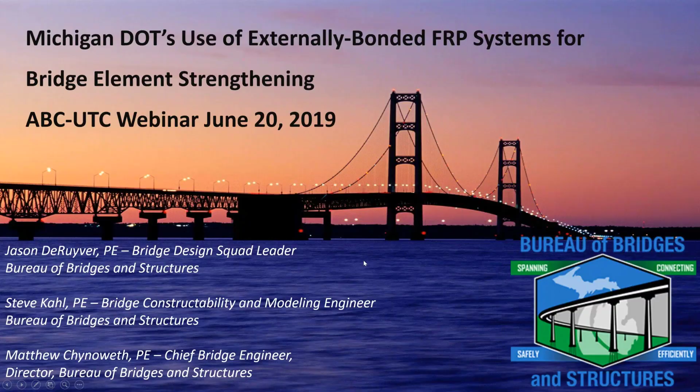What we're going to talk about today is two projects, two case studies where we have used bonded FRP systems for column confinement and passive reinforcement. We're going to talk about I-75 over the Rouge River, which is the biggest bridge in the state of Michigan, and a very complex ramp within our I-75 M8 interchange. Both of these are in the city of Detroit, and I'll show those on a map in a minute.

We are going to talk about the guide specification for bonded FRP repair update, the AASHTO guide specification. There are currently some limitations to that, which we'll get into in a bit, and that is actually very quickly going to be under contract to be updated. Then we just want to touch briefly on the future of FRP and infrastructure as it relates to inspection of FRP elements, load rating, damage, and all of that — just a brief hint as to what we need to work on as an industry with FRP systems.

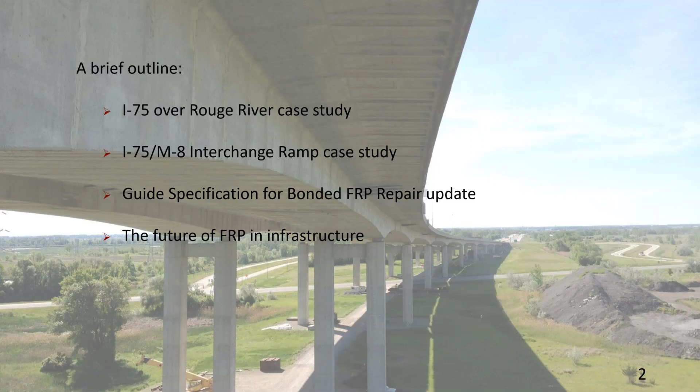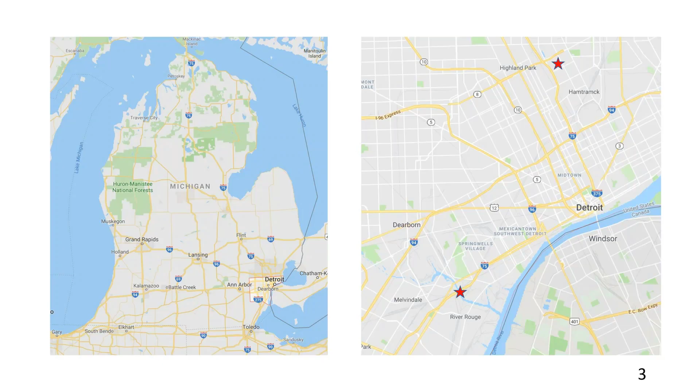So how are these FRP bonded systems relevant to ABC? How is it relevant to our movement towards accelerated construction and less user delay? Well, the use of the bonded FRP systems on these two projects resulted in no impacts to freeway traffic above and very little impact to local traffic below, just in terms of staging and equipment access. So you're driving over the freeway, you would never know that we were working on these bridges.

The systems can be installed fairly quickly, either via pre-qualified contract or contractor, as the first one will show, or using direct force maintenance staff, which is how we did the second project that we're going to show today. So the strengthening or confining of these elements is a viable option for asset management, long-term asset management, which can delay replacement — and replacement of these elements is obviously a huge impact to mobility and traffic. That's how these systems can be relevant to an ABC type of application.

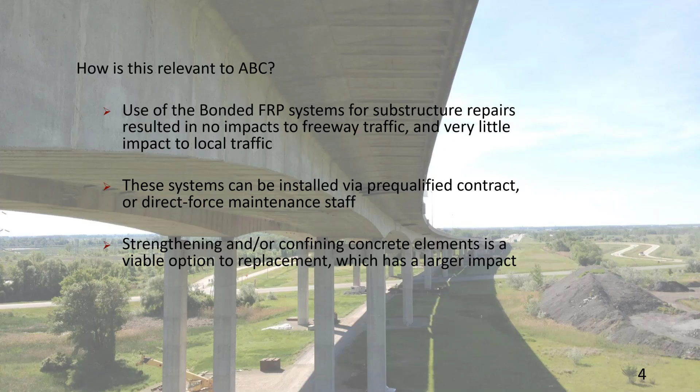So the first project we want to talk about is our I-75 bridge over the Rouge River. This is a 109-span composite steel structure consisting of many cantilever and continuous spans, with a main 3-span continuous unit over the Rouge River.

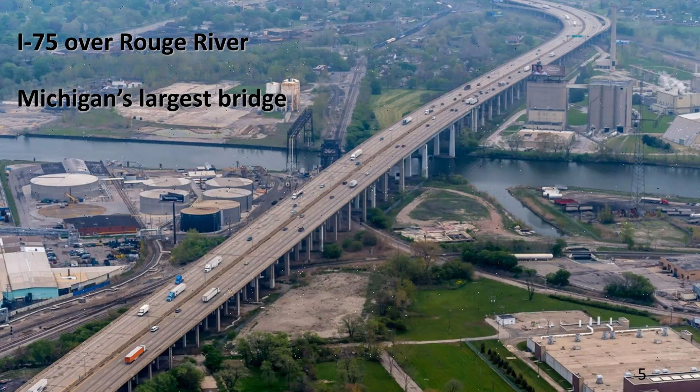As you can see, this chart shows the largest bridges that we have in the state relative to deck area. I think a lot of folks associate the Mackinac Bridge, which is the second one there, as the largest bridge in the state. It is in fact the longest, but when you consider the length and width, the total deck area, our Rouge Bridge has 1.1 million square feet of deck area, thus making it the largest in the state. And this is just a cool photo of the bridge in action.

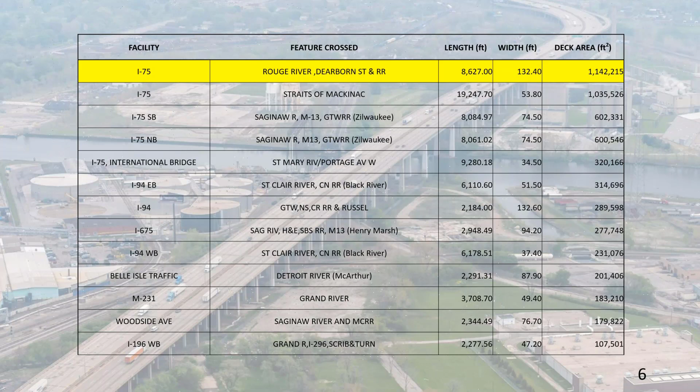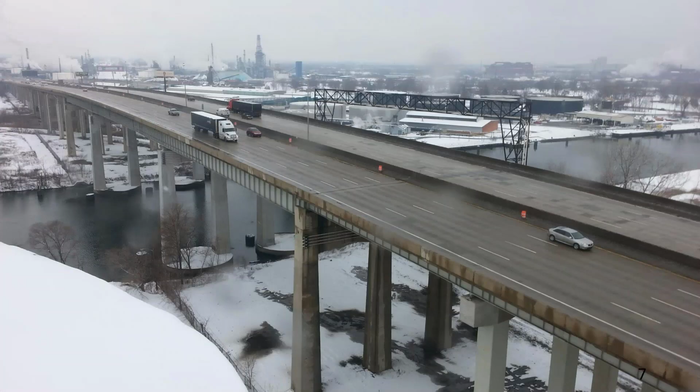So some facts about the bridge: prior to 2018, the bridge was considered to be in overall poor condition. We had a deck NBI rating of 4. However, the steel girder superstructure and the piers were maintaining good to fair condition.

Knowing that we were going to have to do something with the bridge deck, we set out on a pretty comprehensive asset management plan and looked at all options for rehabilitation. We looked at a deck replacement option, a bridge replacement option, different types of bridges that could cross this, and post-tension segmental. Ultimately what we decided was, due to the fact that this particular bridge represents the lowest point in the Rouge River corridor...

This river has a lot of maritime traffic serving the Ford Rouge facility, and at 110 feet over the channel, this is the lowest crossing of the entire Rouge River basin, so we knew we would have to raise the bridge. There are interchanges on either side of the bridge, at each touchdown point of the bridge. All of that led to cost estimates in the $400 to $500 million range to replace the bridge.

But since the steel girder superstructure is in fairly good condition and the piers can be maintained in good condition through various asset management applications, we ultimately decided to replace the bridge deck instead. That was about a $100 million project, and I just want to show some cool pictures of what that looked like.

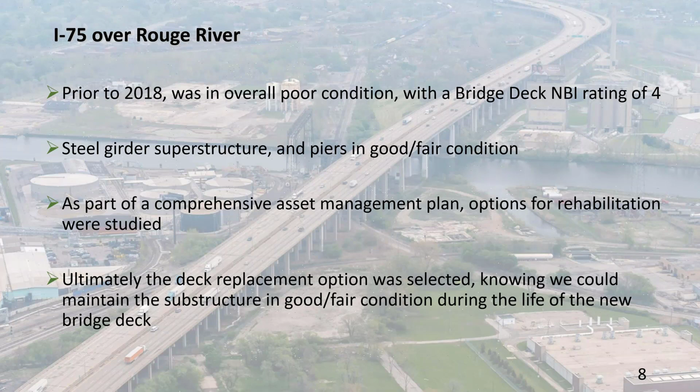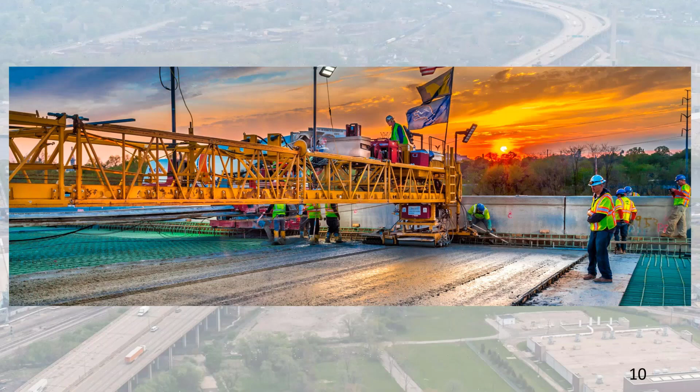So what we decided to do with the many, the forest of columns and piers that we have out there supporting the superstructure, we've had issues. These particular concrete elements contain slag aggregate, which Steve is going to talk about in a minute here, regarding why that's an issue.

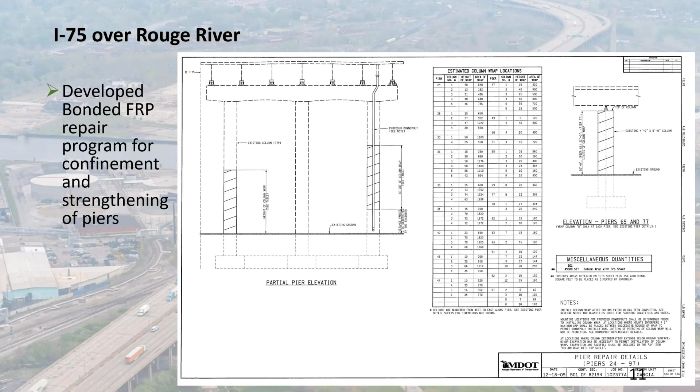We developed a specification for column wrapping. We worked closely with Jim Gutierrez from Caltrans, who's very knowledgeable in FRP systems requirements, and our specification actually addresses the seismic requirements. Even though Michigan is a low seismicity state, we wanted to make sure we were following the best specifications out there, and we worked with Jim on those.

As you can see, this specification just sets up the minimum properties - it's a generic specification. This specification, along with some of the example calculations we're going to show, we're going to make available with this presentation so everybody can have access to this.

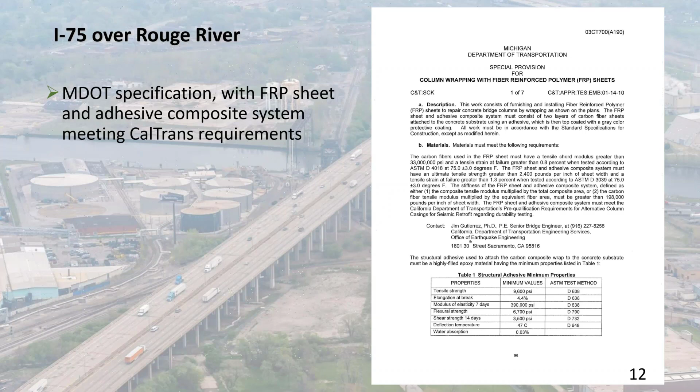We put together this MathCAD sheet, and ultimately decided - there are two main specifications we could have used here: the AASHTO guide specification, or ACI 440.2R-08. Ultimately, we decided to use ACI.

Part of the reason is that AASHTO currently has a fixed FRP strain limit at the concrete FRP interface of 0.005 microstrain, so you really don't get to mobilize more of what strain the materials are capable of. ACI allows FRP strains up to 0.009 microstrain, depending on the concrete compressive strength, and it maxes out at an allowable concrete compressive strength of 8 KSI.

The other big difference is that AASHTO specifies a fixed strength reduction factor of 0.85, which is quite restrictive, considering that the entire guide specification really limits the use of these on flexural members, which have relatively ductile types of failures. Whereas ACI 440 follows the general provisions of ACI 318, which allows different strength reduction factors - for a tension-controlled failure, a 0.9 strength reduction factor, and for a compression-controlled failure, 0.65. Overall, we thought the ACI specification offered much more flexibility for us.

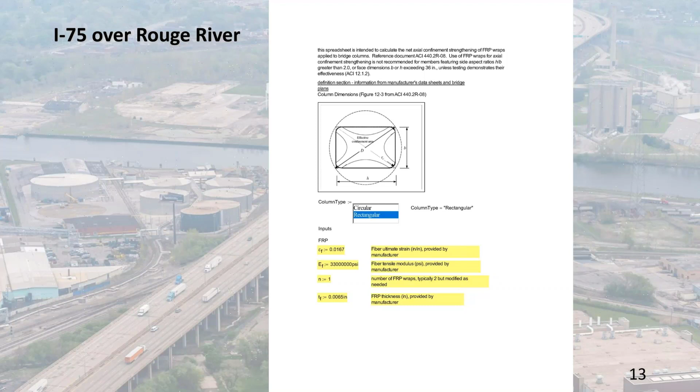As you can see from the sheet here, we do have rectangular columns, so we selected those appropriately and started entering in strain values and the tensile modulus. We go through the inputs for the concrete and the strains in the concrete, and calculate the equivalent circular cross-sectional area for the column.

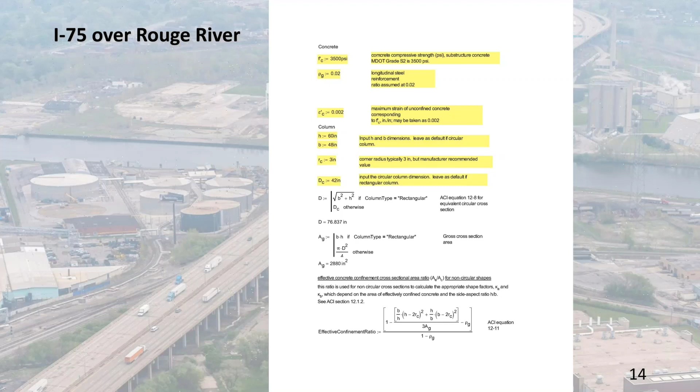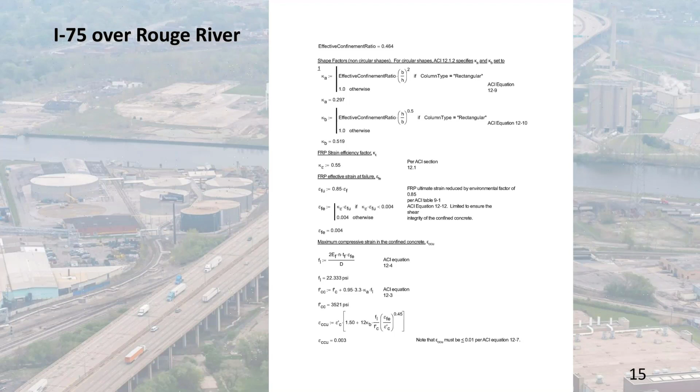We calculate the effective confinement ratio per ACI. We go through all of the applicable shape factors, the FRP strain efficiency factors, the strain at failure, and then we can calculate the maximum compressive strain in the confined concrete. From there, we get the actual additional capacity provided by the FRP system to the benefit of the column.

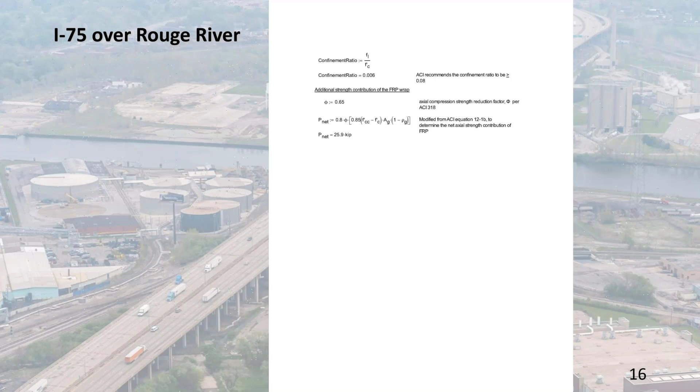So what I'm going to do is turn it over to Steve, who's going to walk through the particulars of why slag aggregate is an issue for us, and then we will go through some of the construction of the project.

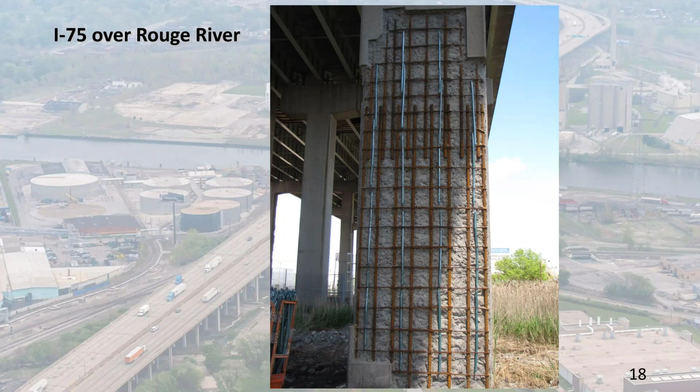After the crack formation, if you do any patch repairs with slag aggregate, you want to carefully make sure you define your removal areas, because if you take a hammer and chip away, you won't be stopping. So you have to carefully lay out the repair area and stay within its confines. You're also going to need a way to maintain or hold that patch in place throughout the life of the structure.

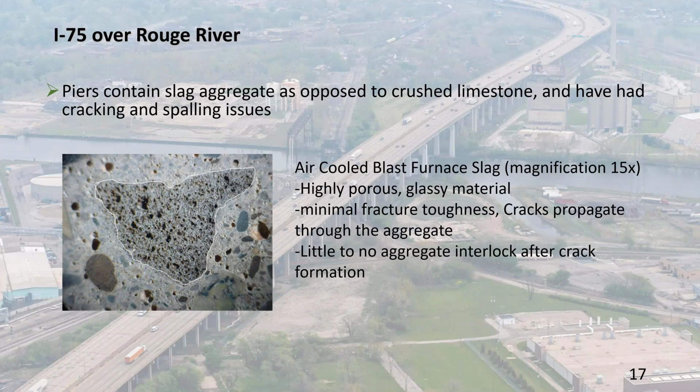So the first step in applying this FRP reinforcement was to remove the unsound concrete from the pier columns and expose the steel for a better bond and performance. In addition to the FRP, we wanted to ensure longevity by placing sacrificial anodes to protect the steel from the ring anode corrosion effect, which combats the issue when you place new concrete next to old. You form an electropotential that accelerates corrosion in the old concrete, so to mitigate that, we threw in the sacrificial anodes.

So you remove the old unsound concrete, and then you begin to prepare the column for the FRP wrap. Are we on to the next stage?

Okay, excellent. First off, of course, you apply the patch material and let it cure. You want to make sure the edges on square columns are rounded to reduce the stress on the FRP, and typically that's a 1-inch radius. Certain manufacturers may specify a preferred radius, some may be smaller or larger depending on the system, but they're roughly around the 1-inch ballpark.

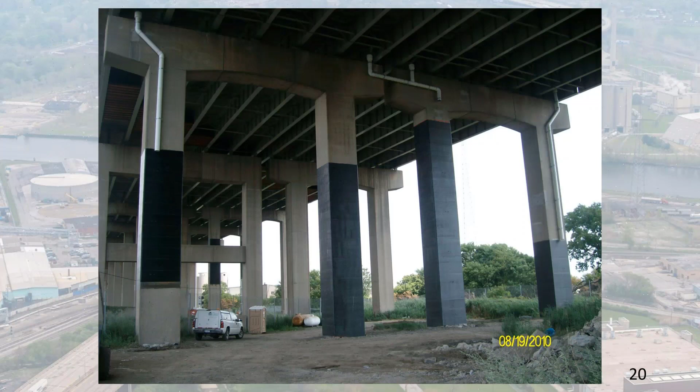So you patch the material, prepare the surface, and apply the primer, and then you're ready to actually apply the wrap. The subcontractor for this particular project was experienced in FRP work, and the spec required that the contractor choose a specialist that was experienced and also have that representative on site for troubleshooting and guidance.

The FRP subcontractor, since they were experienced, was able to use a particular device to ensure that the carbon fibers were fully saturated with the epoxy bonding material. They used an impregnating device that, similar to the old laundry squeegee rollers, passes the fibers through a saturated roller system that makes sure the individual fibers are coated with the epoxy. Then they carefully place the wraps around the columns and roll them into place to get rid of air bubbles.

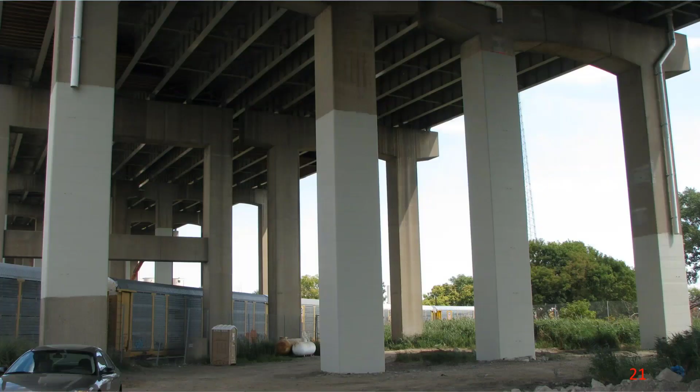After the FRP is installed, typically you put another layer of epoxy on top of the FRP to further coat and make sure the fibers are coated and bonded with the epoxy system. Then after curing takes place, you top coat it for environmental protection and UV protection, although the epoxy itself also has chemicals to resist UV degradation.

The top coat is generally gray concrete color, and depending on the particular manufacturer, they'll have specific requirements. They'll have either their own brand, or a list of compatible products you can use for top coat, for both aesthetics and environmental protection.

As a summary of the project, it was fairly large, but compared to replacement, not really. This project was about $6.5 million for everything, including 23 rehabilitated pier bents, or a total of 71 columns. Quite a bit of patching concrete was used, almost 500 cubic yards, and 49,000 square feet of FRP reinforcement was applied. This was all done in one construction season.

Since we were below traffic, we didn't have to worry about traffic shifts or any other restrictions in regards to that. The contractor was originally Posen Construction, now called Z Contractors, and the specialist was called Structural Group. They did quite well.

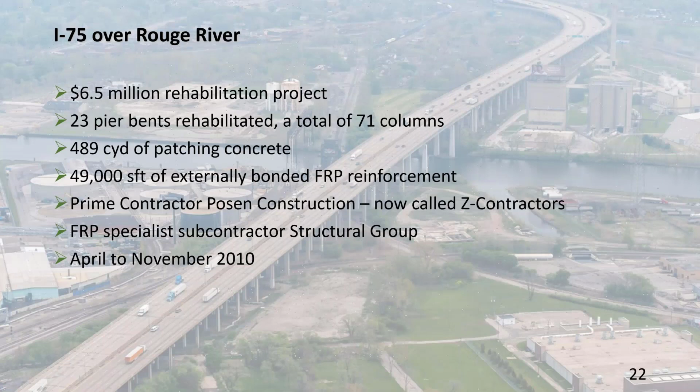Okay, so that represented an example of a project that MDOT did. We designed in-house and let as a capital project. I'd like to show a different example now. This is a project where we worked with a local university to develop a repair scheme, and then our region bridge support folks and direct force maintenance folks did the repairs.

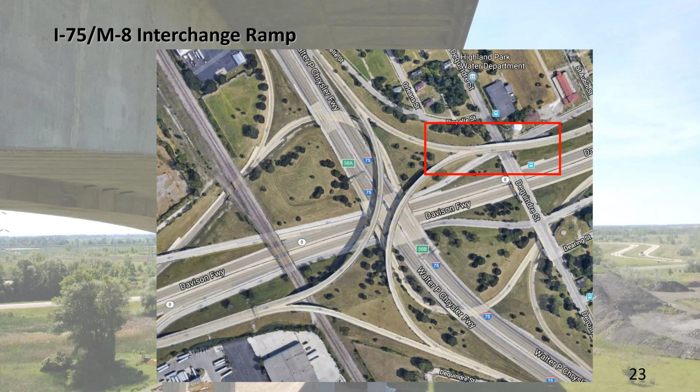And so this is in a very busy interchange on Detroit's north side. The previous project was on Detroit's south side. So this is our I-75 M8 interchange. This is a full freeway-to-freeway interchange with a lot of complex movements. And what we have on this ramp here is, this is a ramp that takes you from one of the service drives to northbound or southbound I-75.

And it's got a very unique configuration. You can see from the geometry there with the service drive coming underneath, we don't have a cap and column type of a situation. We have a single column with a very massive knuckle bearing and then intermediate bent. And this is a fixed bent, so it's allowing for rotation but no translation whatsoever.

It's on a curve, 950 foot. And non-uniform span length, so we don't have balanced span conditions either side. We have an 86-foot span on one side and a 137.5-foot span on the other. And so all of these conditions and this structural configuration led to some forces on this column that caused cracking and spalling. Just some details here - this was built in 1967, by the way.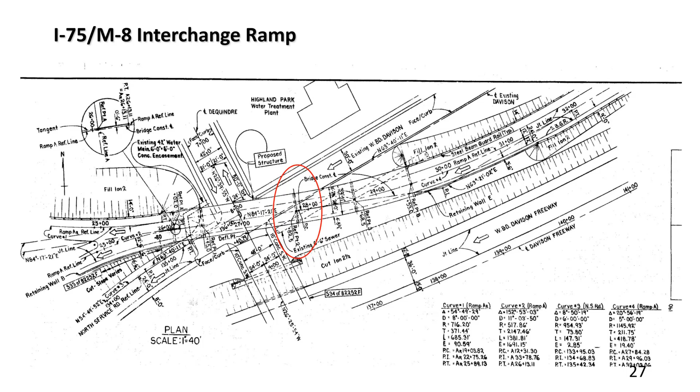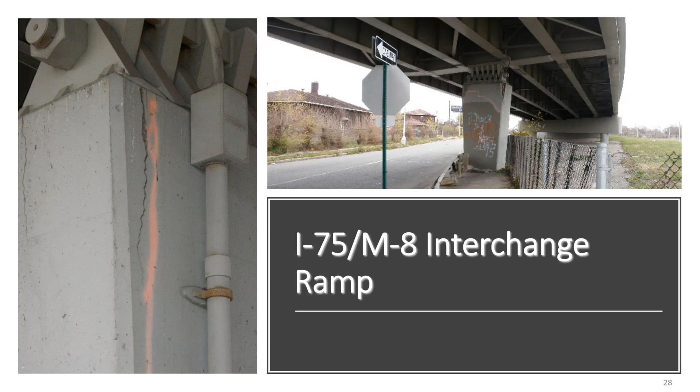Thanks, Matt. As you can see here, the forces Matt was describing caused several cracks and spalls near the top of the column. We just have a few slides here showing different views of those cracks and spalls. It's basically on all four sides of the column near the top.

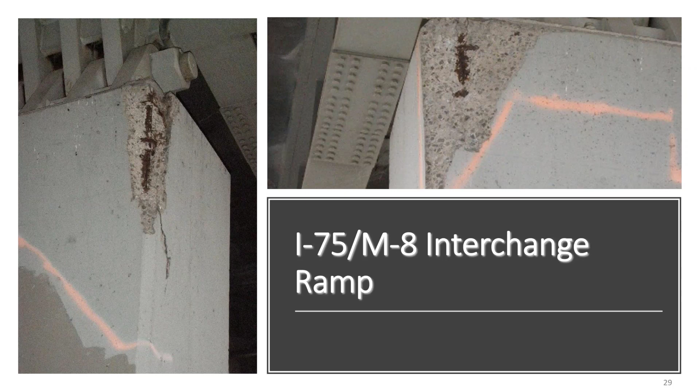All right, in order to do the design, we reached out to one of our universities. In August of 2013, we reached out to Lawrence Technological University, as an expert in carbon fiber design. And he analyzed the bridge and all the loads, and he came up with the actual design for us and sent us over this MathCAD sheet.

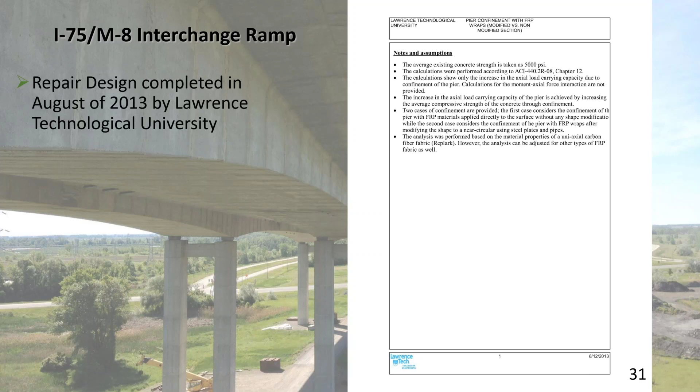Let's see about that. Yeah, as you can see here, we're going to go through this. We will make this MathCAD available on the FIU website here, but this just goes through all of the traditional calculations, the material properties calculations. We went through an analysis of the load carrying capacity of the pier on its own, so unstrengthened and strengthened.

We go through, again, this uses just like we did before, this uses the ACI methodology. So we're calculating the strains based on ACI, checking the confinement, calculating our moduli, and then going through and actually calculating what percentage of additional axial capacity this passive system will provide for us.

And from all this, we calculated the confinement was okay. It kept strains within the allowable. And again, this is a passive system. This is not an active system. And so the total contribution with the new system, we increased the capacity by 42%.

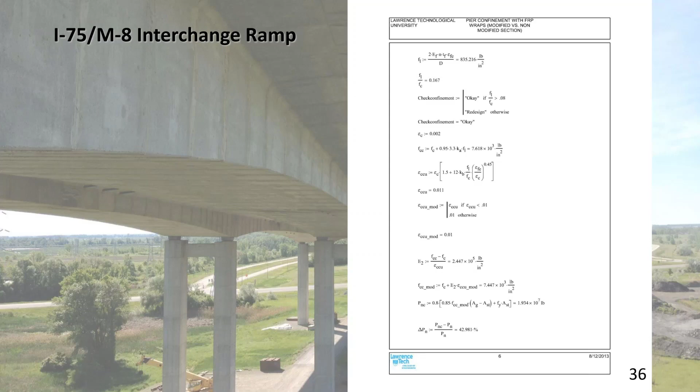And Jason's going to talk through the actual repair of the column. All right, so before we could install the FRP, a few steps had to happen first. We had to close that local road service drive underneath the bridge in order to install all of the temporary supports that we need to install to unload the column. And then we had to patch the concrete.

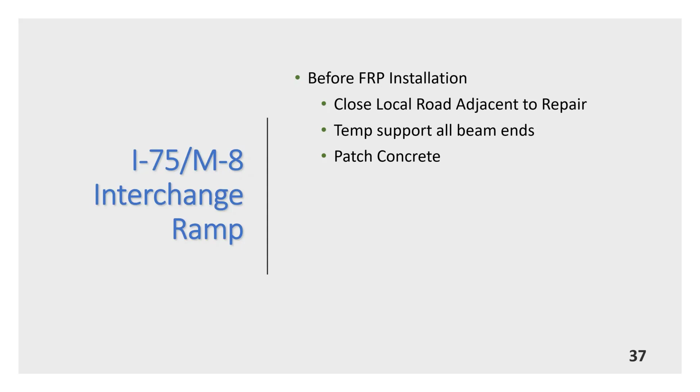Hit the fast forward button here. You can see that the concrete is patched. What I'd like you to notice is that the edges of the concrete patches are pretty rough and irregular, and also that we didn't use any special patching concrete. We just used the standard 4,500 PSI mix that MDOT specs out.

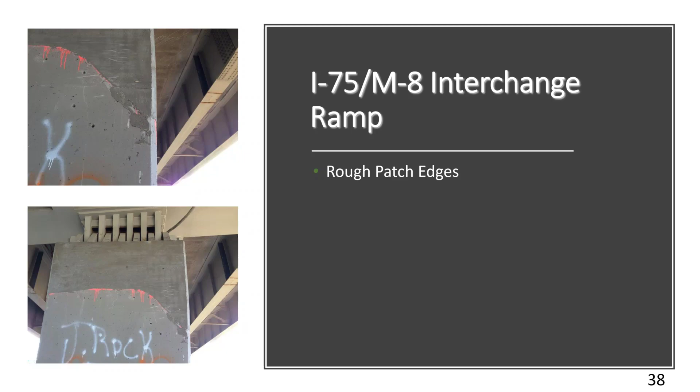Here we are preparing the column surface with a grinding wheel. After we ground all the edges of the patches and all the surface irregularities, we then needed to go in and grind the corners. The fabric we were using required only a 3/4 inch minimum radius.

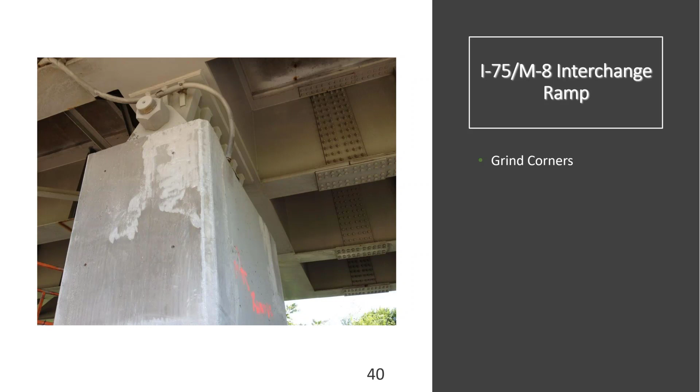In order to finish the concrete surface preparation, the surface needs to first be sandblasted to a minimum ICRI surface profile of CSP3. Basically, that is just removing all dust, dirt, and bond-inhibiting compounds such as oils.

The CSP3 shot blast also opens up the pores of the concrete to allow the epoxy to soak into the surface better, but we don't want to be more aggressive than that with our surface preparation, because then we start introducing more surface irregularities.

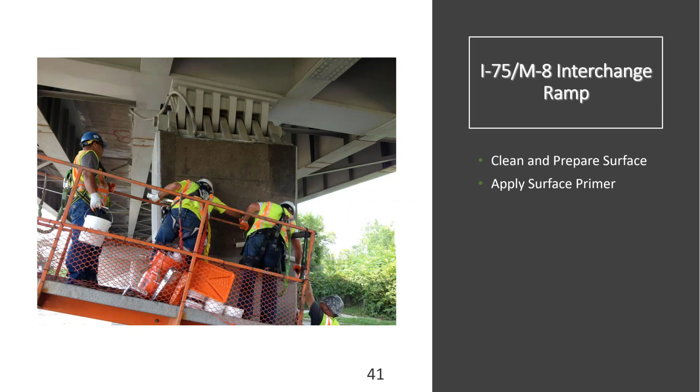So again, we did the CSP3 to just clean it without creating a lot of surface irregularities, so that we don't use as much of what we're seeing here in the next step, which is the epoxy leveling putty. This basically fills in all the little tiny surface imperfections, voids, and bug holes, to get better adherence to the concrete. This is applied immediately after applying the primer - there's no cure time to wait in between.

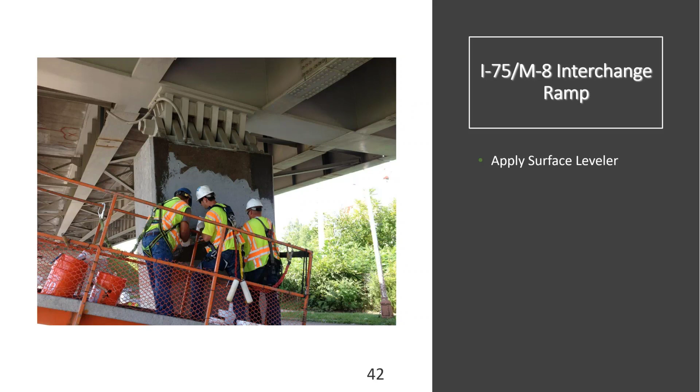Immediately after applying the epoxy, we're applying a layer of the saturant. The saturant gets applied using standard paint rollers. Every manufacturer, based on the thickness of the fabric you're using, will give a recommended coverage rate. For the fabric we were using, we estimated a rate of 45 square feet of coverage per gallon of epoxy.

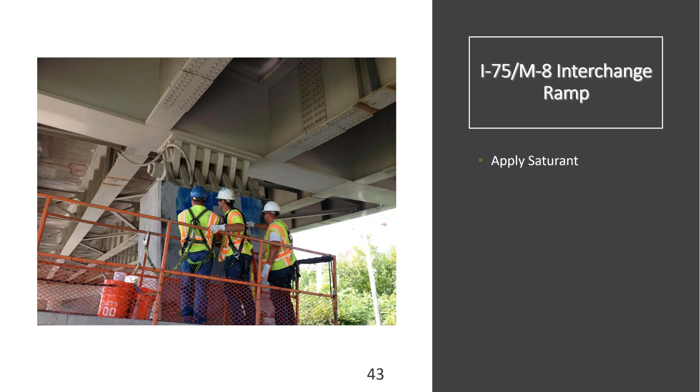Once the first coat of saturant is applied, we applied the fabric to the saturated surface. While the saturant was still wet, any ends that we had needed to be lapped 4 to 6 inches, depending on the design requirements, the fabric thickness, and the manufacturer recommendation.

After the fabric is hung, we used a rib roller, rolled across the surface of the fabric in the direction of the fiber, helping to remove the air bubbles. The rib roller also presses in the fibers to help ensure they are fully encapsulated in the epoxy. The fiber should be rolled until the saturant starts to bleed through the fabric.

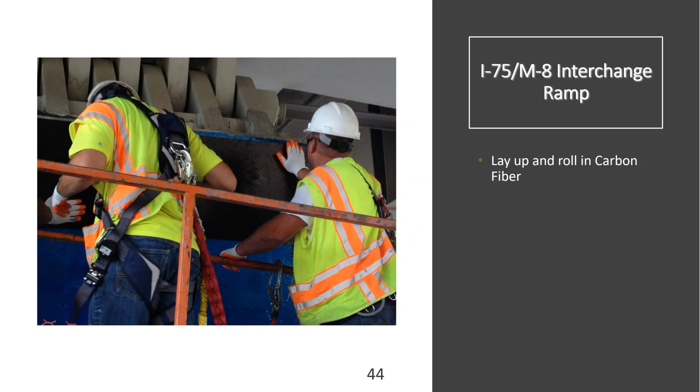After the fabric is set in the saturant, it is then coated with an additional layer of saturant to finish encapsulating the fibers.

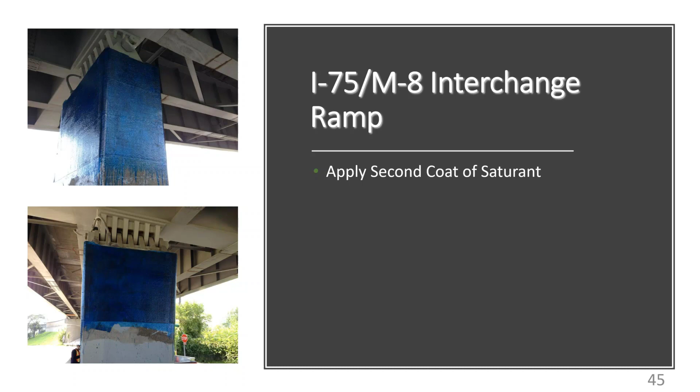Lastly, since this was adjacent to traffic, we decided to coat the entire column with a colored concrete surface coating. As you can see in the picture, you can barely see where the repair area was.

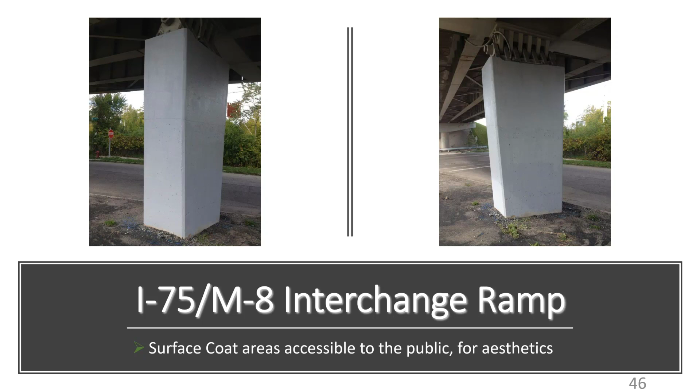Project summary: the carbon fiber design was completed in August 2013, and the design and construction of the detour and temporary beam end supports was completed in August 2014. The concrete was patched by state forces in August 2014, and then the FRP was installed 28 days after the concrete cured. The FRP only took us 1 day to install, and the cost of the carbon fiber materials was only $2,470.

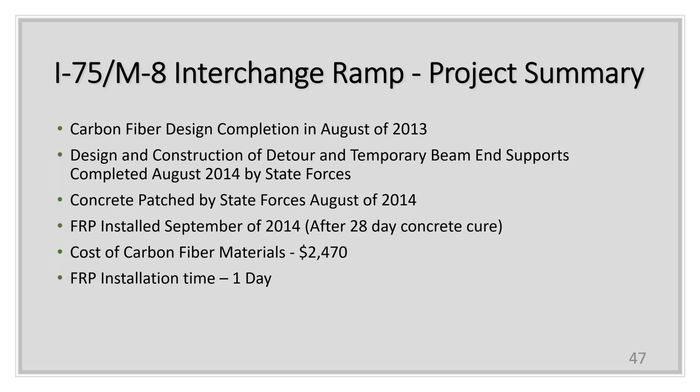Lessons learned: it's quite complex engineering, as you saw earlier, but it is really a simplistic installation. Our state maintenance crews, and I'm guessing your state maintenance crews also, are very capable of doing a repair like this. The one unique thing I needed to throw in here is I had to sign an end-use agreement when I bought the carbon fiber to promise I wasn't going to use it in the manufacturing of weapons of mass destruction.

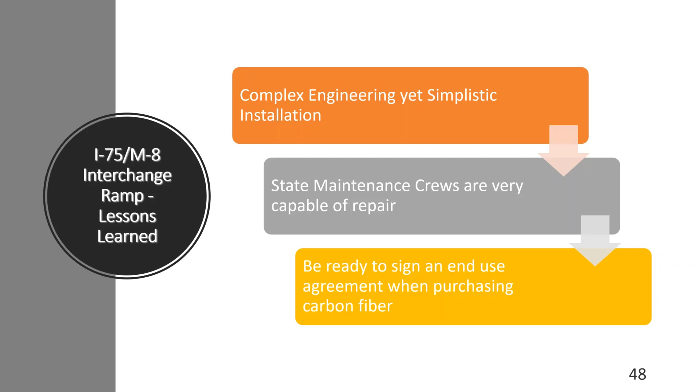Excellent. Thank you, Jason. So just two quick things here to wrap up.

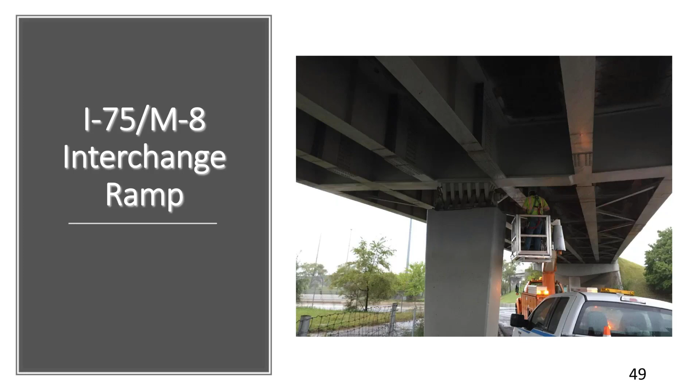As I mentioned earlier, these two examples both use the ACI methodology, and we do have an AASHTO guide specification for the design of bonded FRP systems for repair. It was first released in 2012, and it's not being used as much as I think it should. I think this should be a go-to, especially for a lot of us that are AASHTO states.

So the T6 committee for the Committee on Bridges and Structures, that's the FRP Composites Committee. I am the chair of that, and we developed a research needs statement, and it was selected by NCHRP. It's going to be an NCHRP 20-07 task 428, and we are going to update this. We're going to put together a second edition.

And we're basically going to try to unify the AASHTO and ACI provisions. We want to also ensure engagement with industry so that there's alignment with what industry can manufacture and develop for us. We also want to update it to include near surface mounted strengthening applications. This is another one of those very popular things that's done out in California, and Jim Gutierrez does a lot of work with that. And we obviously want to make sure that the AASHTO specification is using the appropriate strain compatibility requirements, and we're not limiting the strains on the material to something too artificially low.